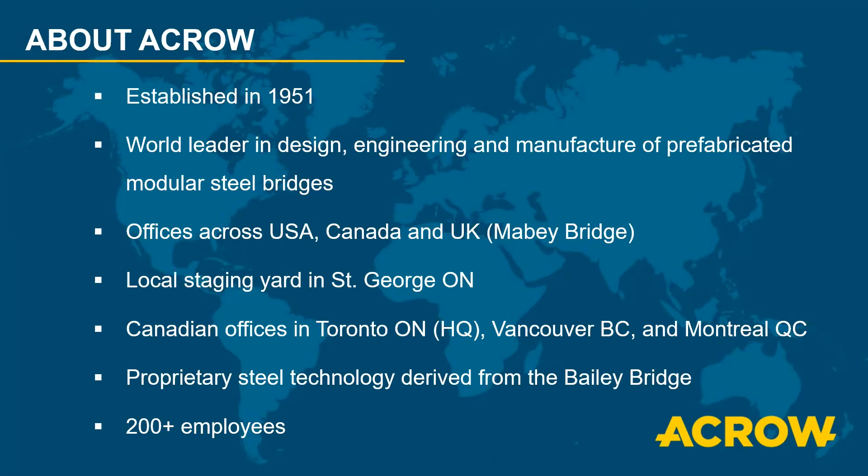It's a proprietary steel technology derived essentially from the Bailey Bridge system. The Bailey Bridge system was developed by Sir Donald Bailey back in the time of World War II, and the Army used this to help fight the war, quickly assembling these bridges to go across. Our system is derived from it, but it is not to be compared with the Bailey system. It is called the Acrow system. It's a panel bridge system, and it has advanced over the years, which I will discuss a little bit later. Our company has over 200 employees worldwide.

So what we do is permanent bridges. Often, when you hear the term panel bridges, we're known for temporary or emergency bridges, international emergency bridges. But we have our fair share of permanent bridges, especially here in Ontario and in Canada. So we do permanent bridges, temporary bridges, as well as military, emergency, and development programs.

Our fabrication and manufacturing facility, Milton Steel Company, in Milton, Pennsylvania, spans 21 acres. It has a capacity for 25,000 tons of bridging per year. We have 95 team members operating over 3 shifts, and we have all sorts of high-tech equipment: 8 robot cells, 26 robots, CNC plasma cutting machines and drills.

You might be thinking to yourself, I signed up to hear about accelerated bridge construction, not to hear all about Acrow. But I tell you who we are and our capabilities really to convey to you that we are an established and sophisticated world-class organization. We have 70 years of experience under our belts, and we know the challenges that bridge engineers like yourselves face.

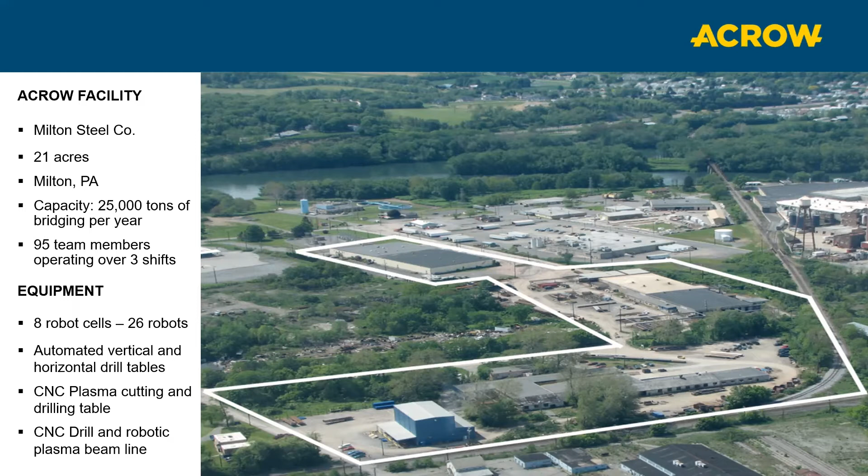So some of these challenges, and I'm sure there are more, but I've listed some of the key challenges, namely failing or inadequate structures. Structures designed before the 1980s generally have a design life of 40 to 50 years. So here we are in 2020, many bridges are now nearing the end of life.

Also, another challenge is limited budgets. That's always a challenge. Municipal tax revenues alone are not often sufficient to build and maintain rural municipal infrastructure. Federal and provincial funding and assistance programs are often not sufficient and typically are too inflexible. So that's definitely a challenge, and it's always a consideration when deciding what type of bridge system to use to make sure that it fits within budgets.

In terms of taxpayer demands and pressures, nobody likes gridlocks. Taxpayers don't want lengthy and inconvenient detours. Also, detours that divert local traffic to another bridge or have them traveling through town can not only have a negative effect on local residents, but can result in expedited deterioration of those detour roads and alternate bridges as well. That volume of traffic still needs to go somewhere. And taxpayers do have some say, some pull, in varying degrees with different cities, municipalities, counties, and townships.

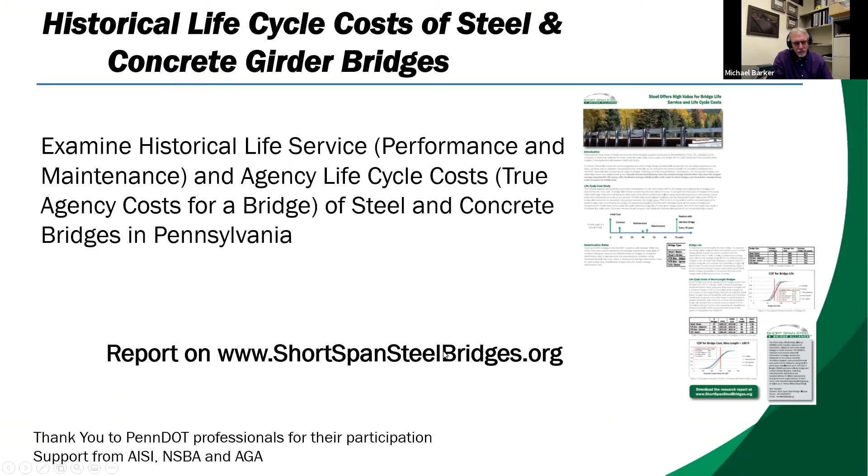Now, since I only have 15 minutes here, I have to make this real quick. So this is really a teaser for you. And if you're interested in this, you go to the shortspansteelbridges.org website and you can see the full report. So we're just going to play a little bit with it. Life cycle cost data - what we need is the whole life history of a bunch of bridges.

We need a comprehensive inventory of bridges if we're going to do some comparisons, which means we need initial costs and the date built, all the maintenance costs and the date performed on that bridge. And then we need to know how long that bridge lasts, or the end of service date.

Well, the bridges in the Pennsylvania inventory are still in service, so I had to come up with an end of life model, which we'll discuss very briefly.

But the second part of this was I really wanted to look at typical bridge structures and modern typical bridge structures. So we're talking about precast I-beams, boxes where the boxes are adjacent to each other, boxes where the boxes are spread with a deck between them, steel rolled shape, and welded plate girder bridges.

And since I'm looking at modern typical bridges, pre-stressing, precasting, all that kind of stuff came on the market in about 1960. And that was also the time that steel bridges really became better at detailing, fabrication, and erection and those type of things.

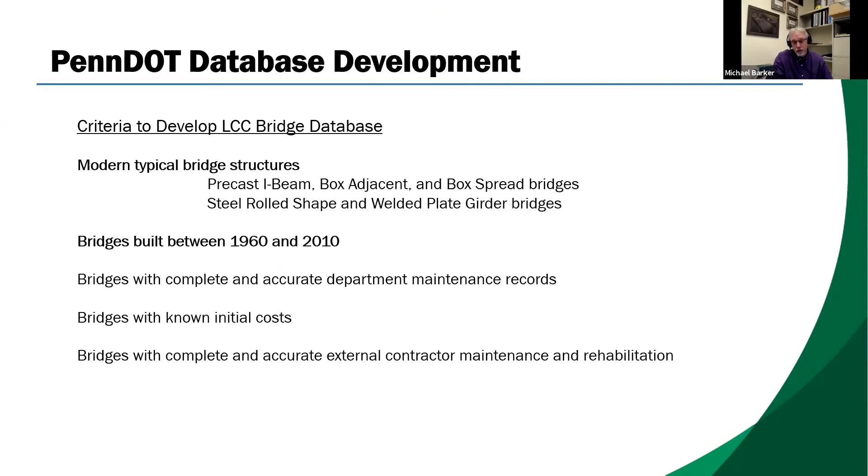So I looked at bridges built between 1960, and then I cut it off at 2010. Then, of course, I needed to know everything that happened to every one of those bridges for it to be in the database. So PennDOT has over 25,000 bridges in their database.

Of those, over 6,500 are of those 5 types of bridges. And when I studied those over 6,500, I came up with a list of steel rolled beam, steel plate girder, box adjacent, box spread, and pre-stressed I-beam bridges.

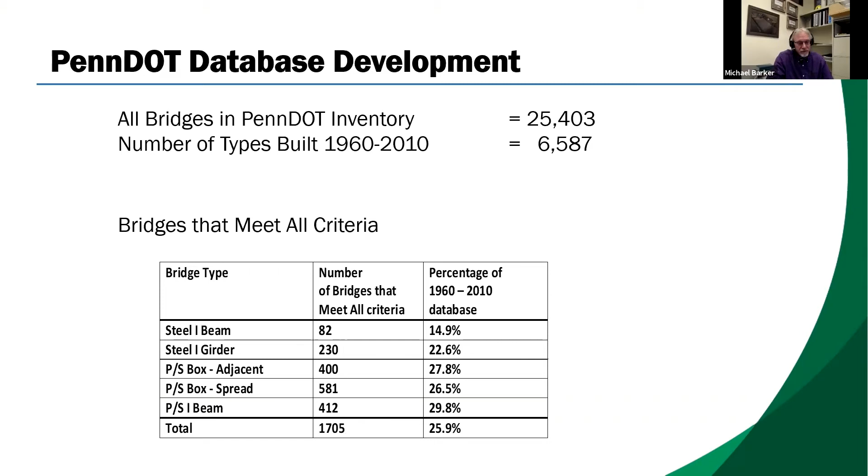And here we had a little over 1,700 bridges that met all the criteria, which means I had the information on everything that's happened to those bridges, which represents a little over a quarter of the potential 6,500 bridges, which is a pretty good representation.

So now that bridge life model, again, remember I'm going through this fast because I only have 15 minutes, but all this is really well explained in the report. And there are hour-long videos on that website where if you are interested, you can go and watch those. So I had to come up with a bridge life model.

When was that bridge going to be replaced? I based it on deterioration rates, historical deterioration rates for all 6,500 potential bridges, where if I assume the bridge was a superstructure condition rating in the US, that's what we use, of a 9 when it was first built, which means it was a perfect bridge, then given that I looked at these bridges in 2014, I can calculate a deterioration rate.

Then, if I assume that bridge is going to be replaced when it reaches a 3, then I can calculate the remaining life. And then the bridge life is just how old is it now plus the remaining life.

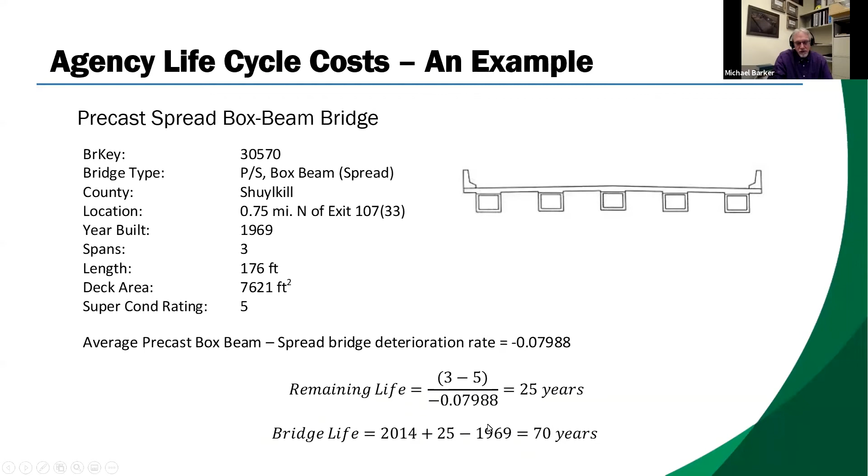But the important part is in 2014, it had a superstructure condition rating of 5. And these type of bridges had an 8% deterioration rate per year. So I can predict the remaining life is 25 years. From 1969 to 2014, that gives me another 45 years. So I am predicting that this bridge lasts 70 years.

Now we deal with the costs. Of course, the costs are based on US dollars, again, making fun of the difference between the US and Canada. But anyways, it was built in 1969 for $141,000. Now I divide it by the deck area so I can compare bridges to bridges, but that's in 1969 dollars. And then in '88 there was some maintenance, and in '09 and '13.

I took every bridge in the database and pretended they were all going to be built in 2014, using construction cost indices to account for inflation. So here are the costs in constant 2014 dollars.

Now I lay out that timeline. Here is one life cycle for that bridge. It's built in year 0. In years 19, 40, and 44 there are maintenance events, and then it lasts 70 years.

Now we find a present value cost for this using a discount rate of 2.3%. We get a present value cost, which is what we do in life cycle costing, of $154.50 per square foot. That means if we had that money in the bank when we wanted to build the bridge, it would sit there and we could pay for those 3 maintenance events, and when we're done, the money is gone.

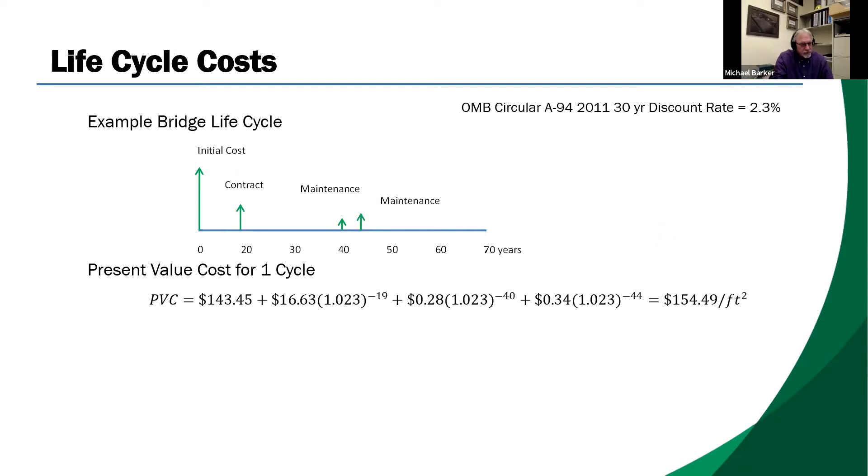But this causes a problem, because this bridge lasts 70 years, and I can't compare that to a bridge that only lasts 40 years since the outcomes aren't the same. So instead we use perpetual present value cost, or what's more commonly known as capitalized cost, which assumes we replace the bridge with an equivalent bridge forever.

When we determine the capitalized cost, it comes out to about $194 per square foot, which means if we had that today, we could build the bridge now, pay for one cycle, and at the end of that cycle we'd have the money there again to do that forever. With capitalized costs, we can compare bridges directly.

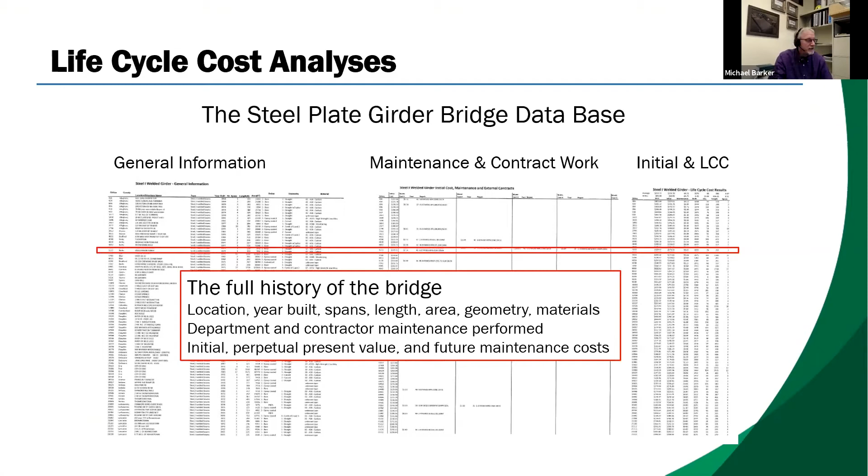So all 1,700 bridges I put into Excel sheets, 3 for each type of bridge. One file had general information: location, year built, spans, length, area, geometry, materials, and that kind of thing. The second file was department and external contractor maintenance performed, with costs and dates. The third is the results, where we look at initial costs, life cycle costs, capitalized costs, and even present value of future maintenance costs.

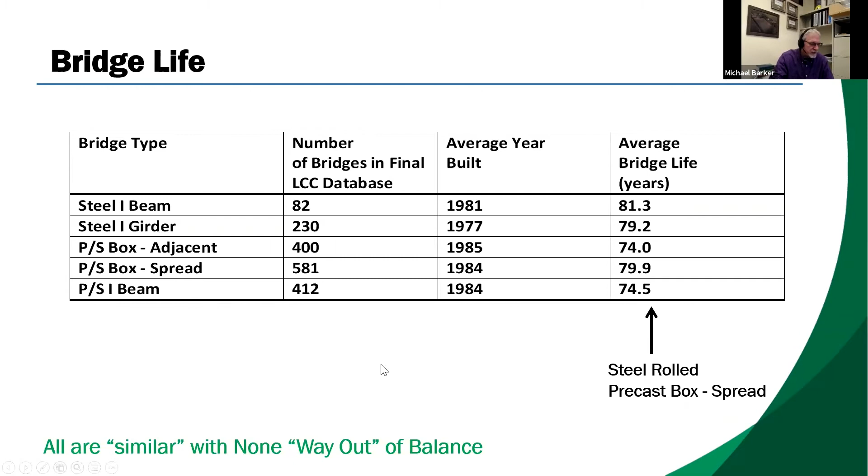Now we come to the money part. This table shows the results for the whole database, all of the bridges. You see the number of bridges in the database and the perpetual present value costs, or capitalized costs.

For all of the bridges in the database, precast I-beam has the lowest perpetual cost, with steel rolled beam second. But again, none of them are way out of balance, so there's that statement on the bottom left: all are similar with none way out of balance.

This table also shows the initial costs and the present value of future costs, the average length, average number of spans, average year built - those are pretty consistent - and the average life again. This is one of the problems: it's hard to directly compare precast I-beam bridges or adjacent box bridges, which are usually simple span bridges, to plate girder bridges, which have an average number of spans over 4. The average length of a plate girder bridge is 406 feet, and even for the rolled beams, it's 166.

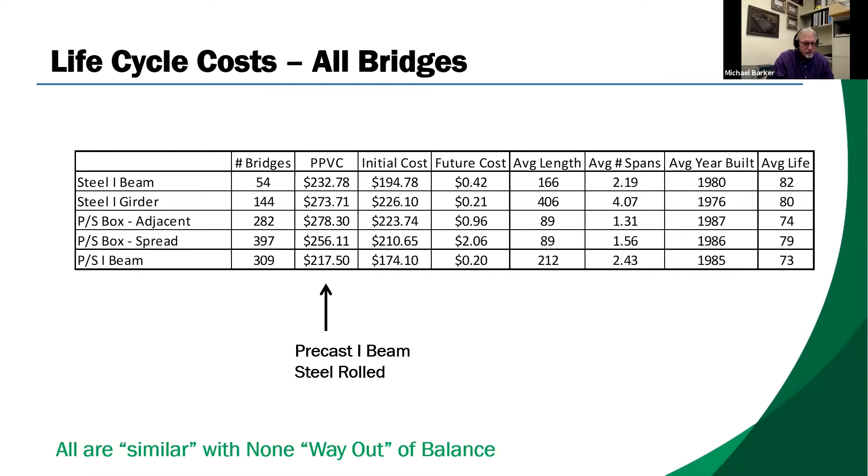This is good to look at, but we need to narrow that down a little bit. Since I'm part of the Short Span Steel Bridge Alliance, we're going to look at short length bridges. The Alliance deals with simple span bridges, but I'm not going to limit it to simple span. I'm just going to say bridges that are less than or equal to 140 feet in length.

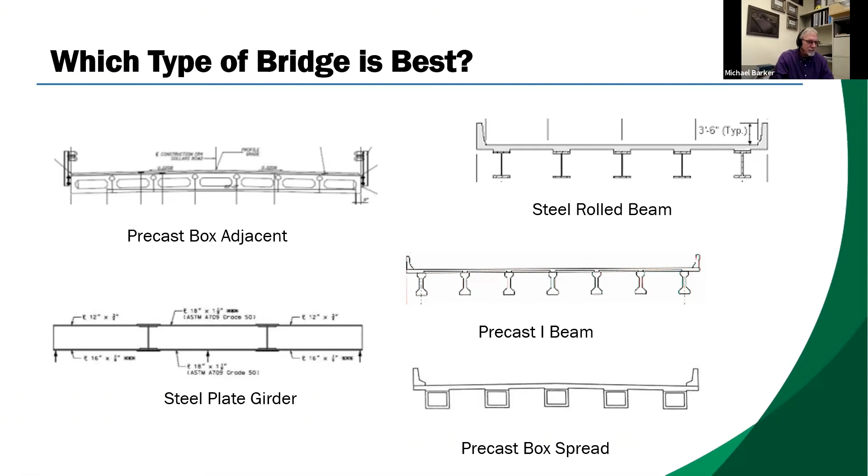And the question is, which type of bridge is best? Is it the precast? Is it the rolled beam? Is it the precast I-beam, box adjacent, whatever. And here's where I come back and say that all are similar with none way out of balance.

If I take the overall weighted average capitalized cost, it comes out to be a little over $252 per square foot. All of the bridge types, the 5 different bridge types, all of their averages are within 14% of that.

I didn't show it here, but I do in a longer version of my talk. If I look at the standard deviation range within each type, or coefficient of variation of 20 to 25%, and if we're within 14% of the weighted average, what that means statistically is that any one type of bridge may be most economical for a given bridge project. There is no one type of bridge that clearly beats the others.

And that brings me to my conclusions. One reason I do this and look at initial costs is because there's a preconception out there that concrete is less expensive than steel. And you thought I was going to come in here and say, hey, steel beats concrete hands down, you should build everything out of steel. No, that's not what I'm saying.

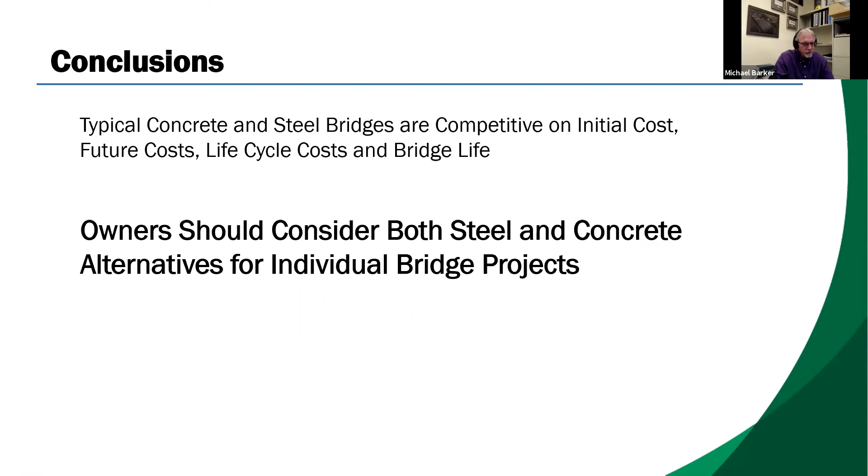The results of this, and what we've known for a long time, is that typical concrete and steel bridges are competitive on initial costs, future costs, life cycle costs, and bridge life, and that owners should consider both steel and concrete alternatives for individual bridge projects. And so that finishes me up.

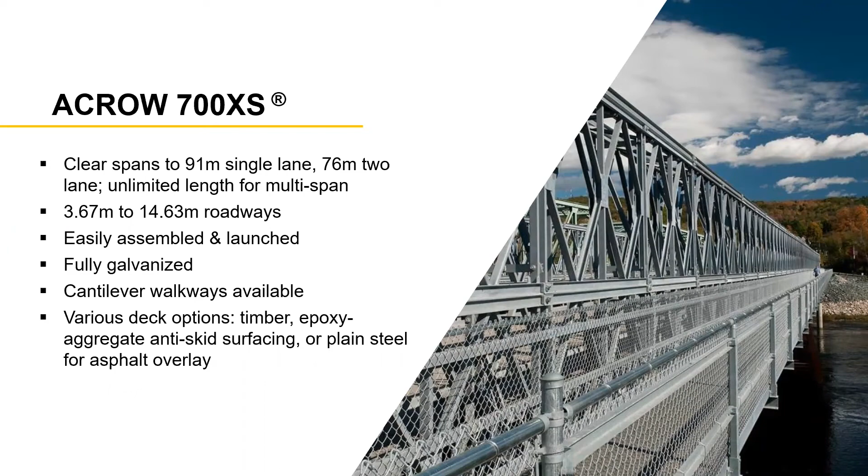Here's the system. As I mentioned, it's a modular sort of thing. Panels are assembled, and the configuration of this bridge can be different depending on the criteria that we design for. So whether you have one line of trusses, or two or three lines of trusses per side, like this one here, we will determine based on the loading criteria what configuration needs to be designed for the bridge.

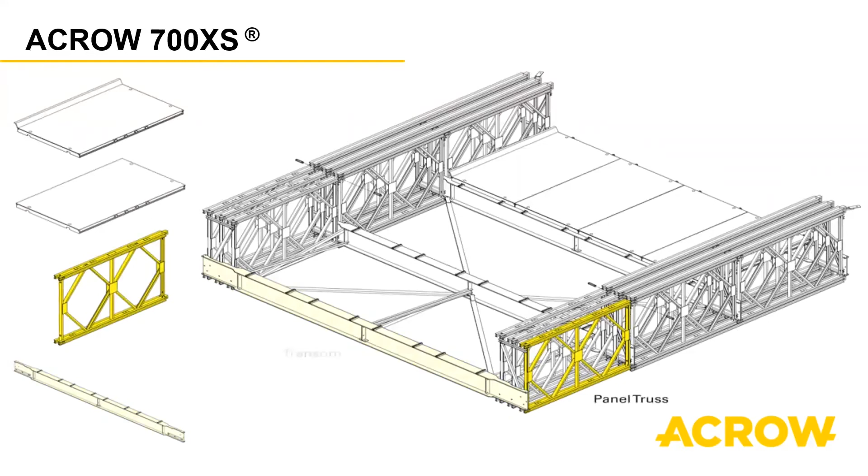The floor beam, or the transom as we call it, also varies depending on the design criteria. We have various different widths, and various different strengths of transom.

And then we have the decks. These are the steel decks, orthotropic steel decks. This is a curbed deck that basically has a curb on either end or either side of the bridge. And then we have just the standard decks. Essentially the width of our bridge is determined by the width of this deck, so you can do it in increments of the width of this deck.

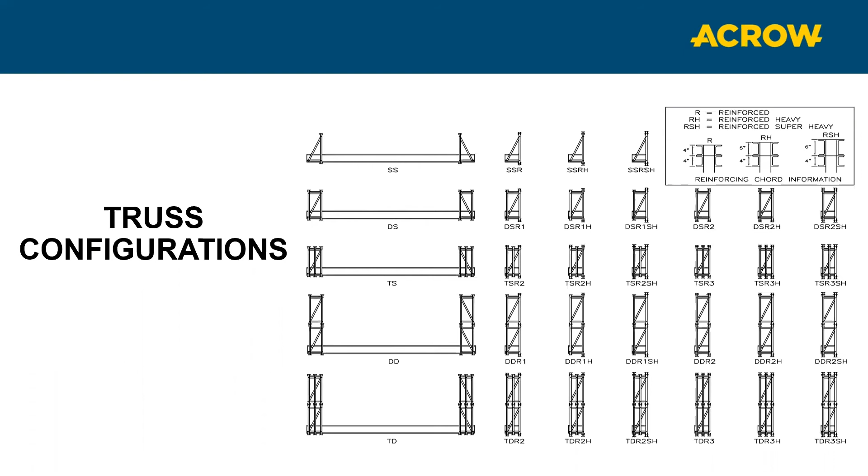In terms of guardrails, we do offer an integrated post and box beam guardrail steel that essentially takes away the worry of damaging the truss panels if there is an incident or impact. The guardrail is connected to the transom or floor beam, therefore the impact is absorbed by the transom as opposed to the truss, minimizing damage to the truss itself.

We also, oftentimes, thrie-beam guardrails can be used. These are standard, not supplied by us. They do not meet the crash tested criteria like the previous one does. With the two tubes, the two box beams, this is crash test level compliant, up to AASHTO test level 4. Canada does follow the AASHTO code as it relates to guardrails, so it complies.

Thrie-beam, as I mentioned, does not meet the crash tested criteria under AASHTO, but often they don't need to when used on rural roads and bridges. The thrie-beams can be applied directly to the truss beams, and this is often the case for rural municipalities. We see municipalities and the MTO specifying a thrie-beam or flex beam right on the panel trusses themselves, and this is an option. However, we highly recommend if you go this route to ensure there is a double truss line bridge line, so there is a level of redundancy, because the impact is absorbed by the truss and not by the transom in this case when using a thrie-beam.

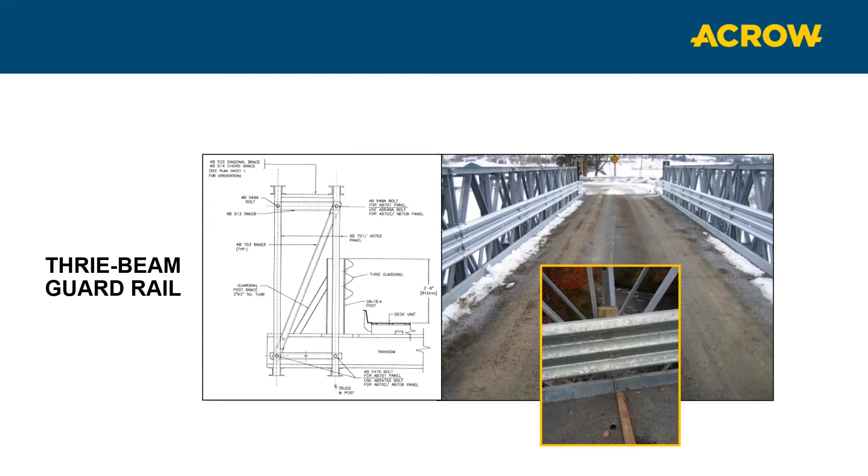At Acrow, we determine the truss configurations based on the design criteria we're given, be it the span, roadway width, design loading, design life, the code being used, etc. We only design the bridge superstructure, not the foundations. We give the reactions at our bearings to the people designing the foundation so they can use this information, and we also supply a bearing layout to assist with the abutment designs in terms of geometry.

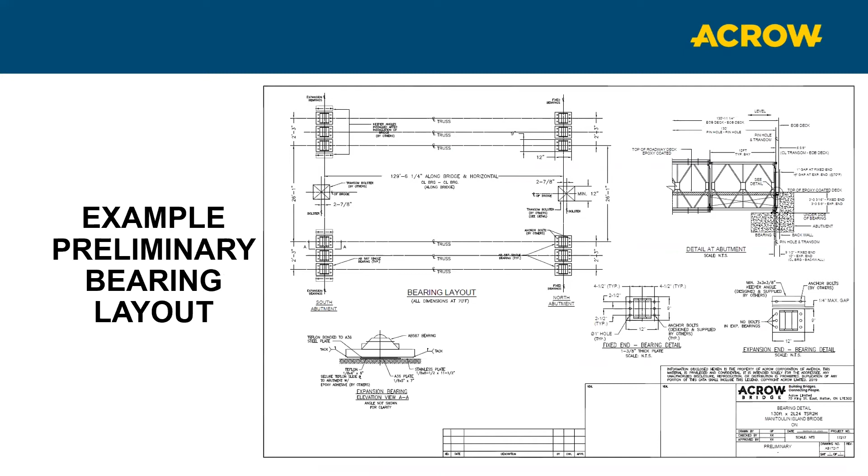Now, in terms of installation, these systems are fairly simple to install. There are three typical methods used: cantilevered, crane-assisted, and crane lift-in. I'm going to briefly go over all of these.

The cantilever launch method allows an Acrow bridge to be rolled into place without the use of a crane. There's a launching nose that we design, utilized when you don't have access to the opposite abutment to use a crane to pull it. So you can only work from one side, and this launching nose lets you push it across to the other side, then remove it once it's there and you've jacked it down onto the abutment.

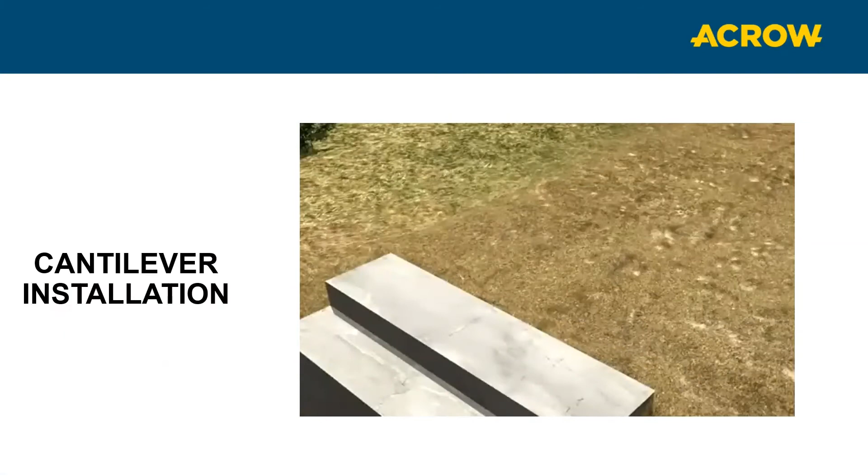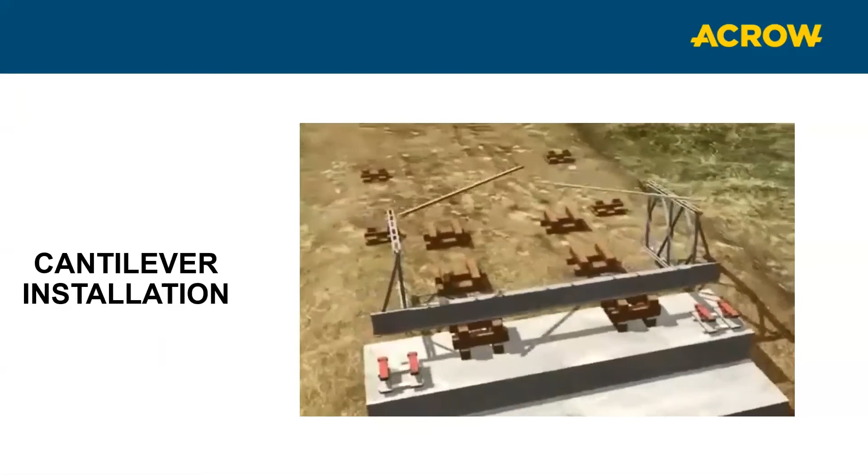There's a short video here showing the cantilever installation method. This shows how these parts assemble—it's an incremental assemble-and-push technique when doing a cantilever launch.

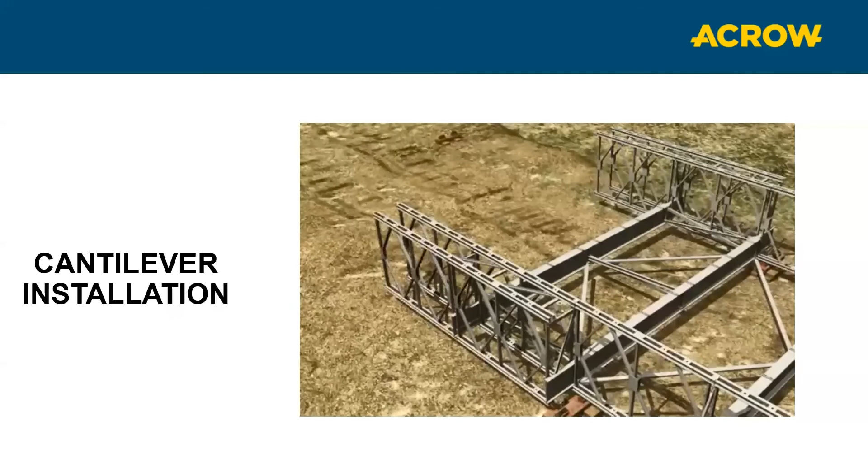Here, they've assembled the launching nose, transoms, and beams. This one is a double-single, so you have the double truss line and a single story. As they assemble, they have the chords and the reinforcing chords that they're putting at the top and bottom, and then they begin the push.

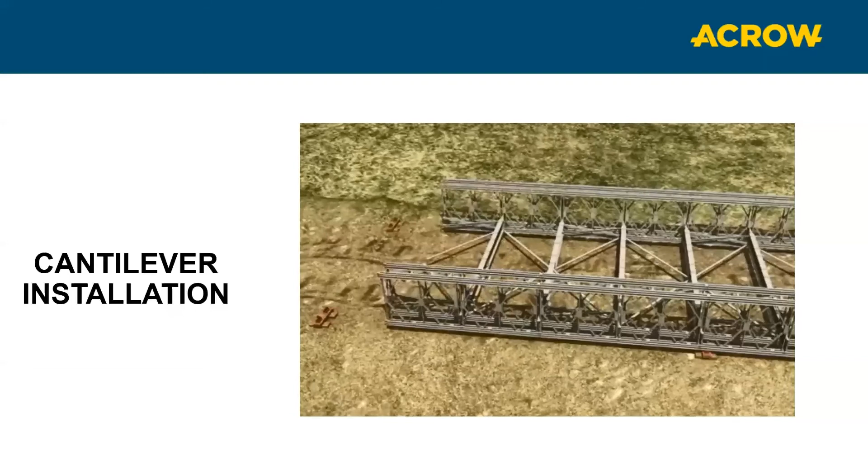You don't necessarily need heavy duty equipment for this—you can use a dozer, an excavator, anything. We provide rollers, as you can see on the ground there, that you would push. So they're incrementally assembling and pushing.

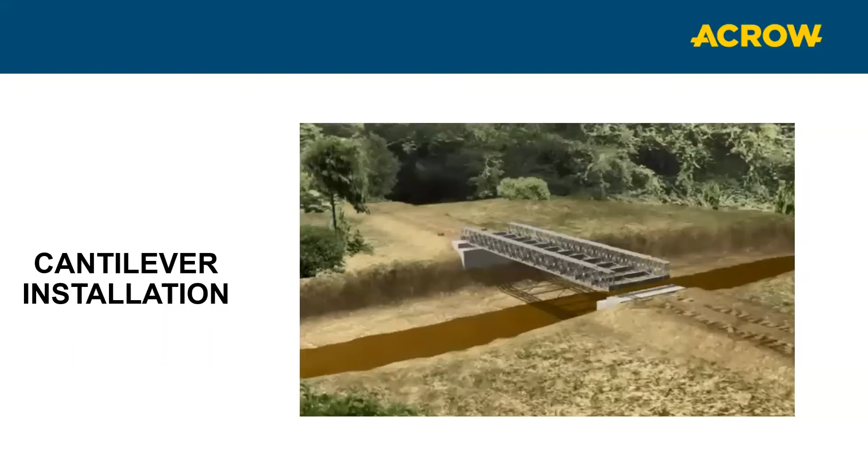What you saw at the back is the decks, the steel decks, being used as counterweight, which is typically the case. And there you go—they've jacked it down and are putting those steel decks into place afterward. At this point, you can install guardrails and such as well. So that was the cantilevered launch method.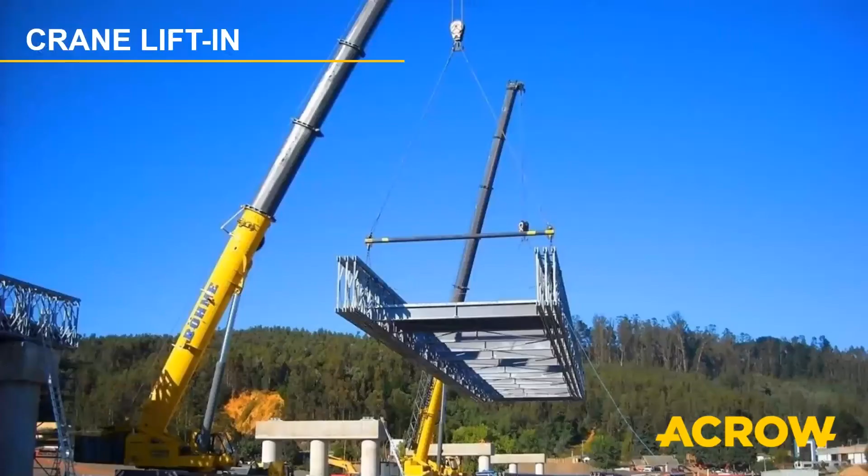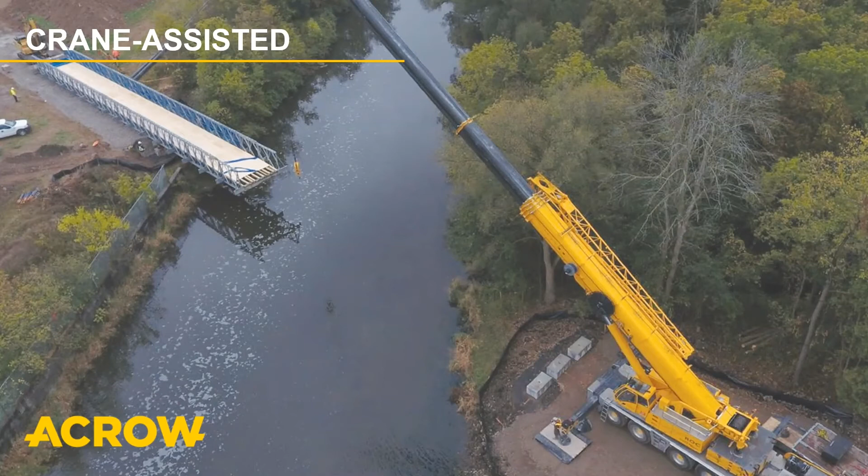Typically, what most people use is the crane-assisted launch method. An Acrow bridge can be launched using a crane if the required equipment is available and you have access to the opposite abutment. This is similar to the cantilever launch in that there are rollers and you push it, however there's no launching nose. You push it up to a certain point, keeping the center of gravity on the home abutment so it doesn't tip over. At a certain point, close to the middle, the crane takes over and lifts the bridge, and you can push and pull with the crane.

Finally, with the right size crane, an Acrow bridge can be lifted into place. This is the fastest method, suited for exceptionally demanding situations where timing and speed are critical, assuming the span isn't enormous. This is a very efficient method of installation—you just rig it up onto your crane and place it on your abutments.

Now this here is an approximate Acrow speed of construction. These panel bridges go up very, very quickly. This is by no means an exact time estimate, but given our experience, a span of 10 meters can be assembled in a single day, which is significantly faster than concrete type bridges.

Next, I want to present some bridge application examples and demonstrate how accelerated bridge construction through the use of steel panel bridges can address the need for speed, durability, versatility, and cost effectiveness in project delivery. I'm going to go over these fairly quickly—we have a lot of slides and not a lot of time, so hopefully you'll capture the gist of these examples. So, vehicular bridges done with the system—these are pre-engineered.

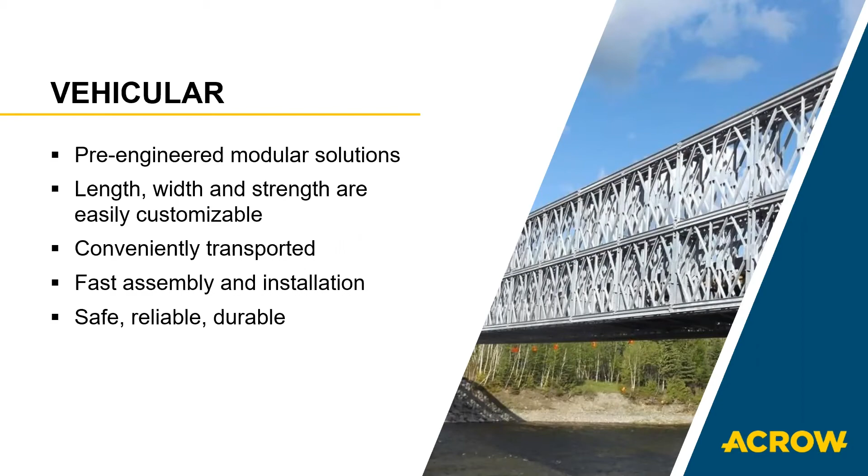Here's an example in the Yukon. This is one of the first permanent bridges we did. It has a sidewalk, or footwalk, on one side with a custom railing system, in extreme cold. Acrow doesn't use notch tough steel, but this bridge has held up very well with no cold, brittle fracture.

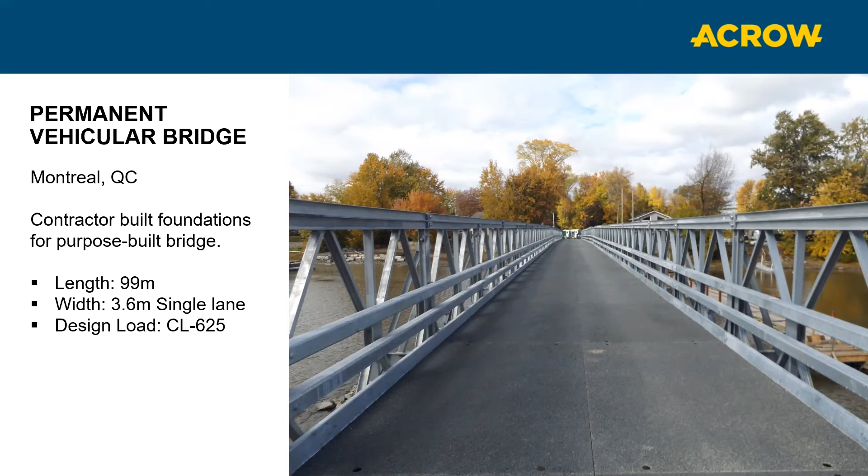Another permanent bridge example, same as the previous one. You can see the bridge has a slight camber. It's a 99 meter span bridge, single lane, 4-span, 99 meters total length, designed for CL-625 loading.

This permanent bridge is in the Township of Lanark Highlands in Ontario, showing the asphalted surface and the TL4 guardrail, the integrated post and box beam guardrail. The township put this out to tender and it was over budget. They knew of us because we were doing a project nearby, and considered our panel bridge. Ours was nearly $1 million less than the original consultant-designed bridge, so it was a nice solution for them.

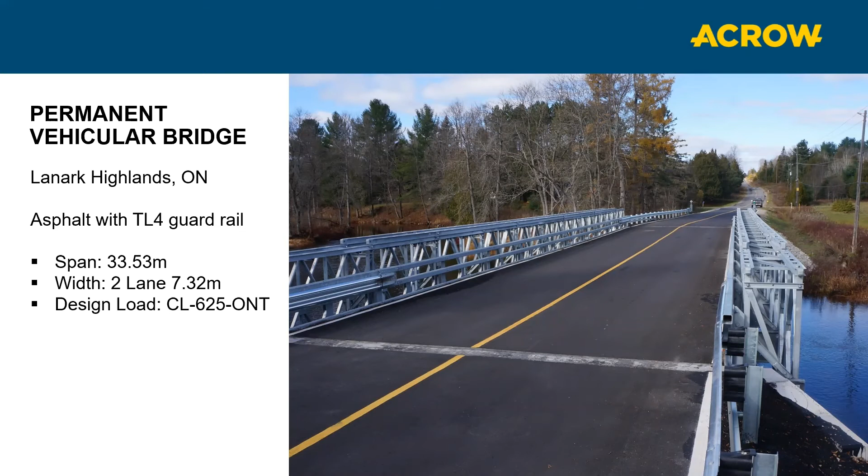Here's another permanent bridge example, City of Port Hope in Ontario. Permanent bridge, asphalted, TL4 guardrails. This is our wider 2-lane bridge, 9.1 meters. It has custom railings at the ends and a nice bike rail as well.

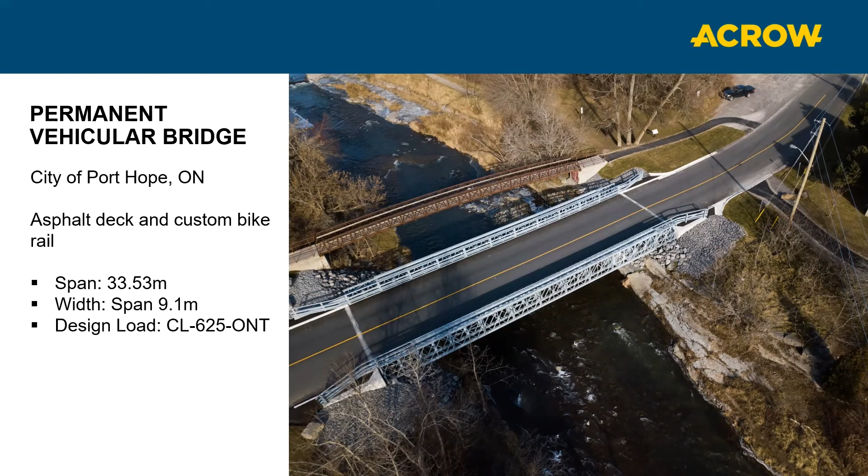This is the Edison Road Bridge in Vienna, Ontario. It was prefabricated with steel stringers and a steel grate decking, or grid deck, which allows mud and snow to fall through.

Here's a project in Toronto, Ontario. I want to show you this because it has a poured in place polymer deck, consisting of a polymer modified cement applied at a thickness of 12 millimeters, which seals the surface from salts, de-icing materials, petroleum, and most chemicals. That's not something we supply, but they were able to do this over top of our plain steel decks.

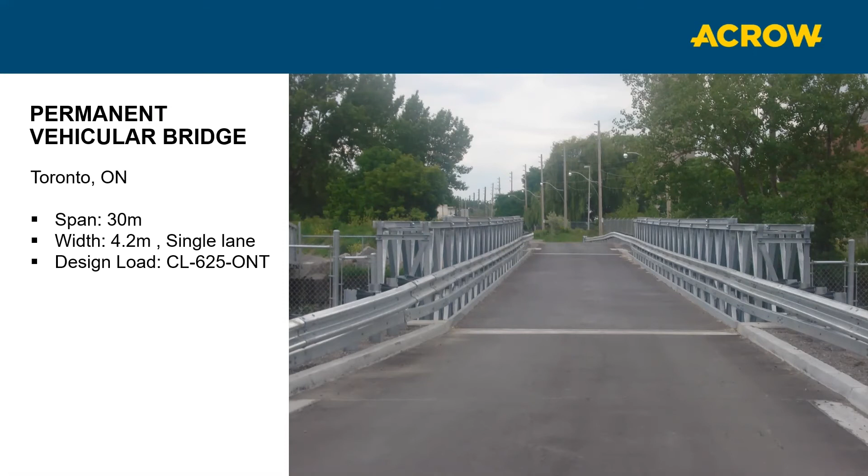Here's a bridge in northern Manitoba showing timber decking. The main span is 76 meters across 3 spans, on a winter road in a very remote area. It has different configurations for the different spans - you can see at the forefront it's a single story, and in the middle it becomes a double story. This was designed for CL-625 loading.

This one is a temporary service road bridge purchased by the city of Regina, then repurposed as a secondary road bridge. I wanted to show this because it's something municipalities can do - they can take ownership of a bridge, purchase these panel bridge systems, and then reuse them as needed on future projects.

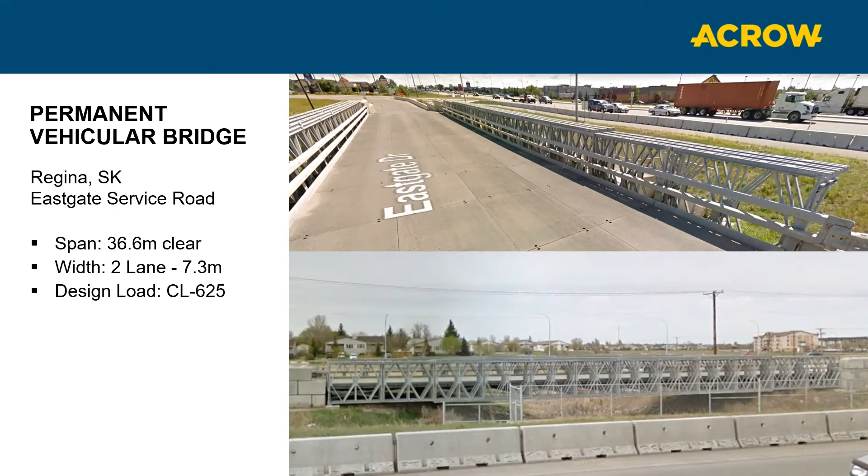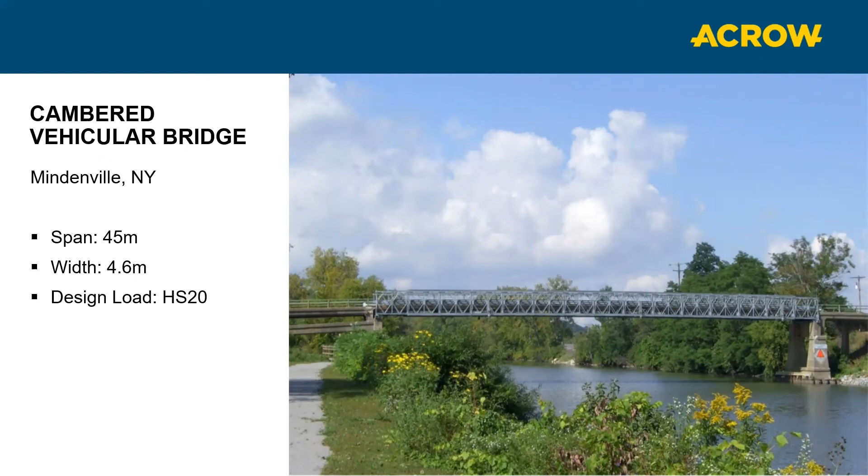This is another cambered vehicle bridge in the USA, crossing the Erie Canal. It was designed to be supported by existing piers, so there was no need to beef up the piers - they used what was there, and our bridge was light enough to go on the existing abutments.

Now, talking about long span bridges, we have systems suited to long clear spans of up to 100 meters. We can do multi-spans with no limit in length, single or multiple lane. These can be rapidly mobilized and installed, and are designed for high fatigue permanent applications.

This system is the Mabey Delta Bridge system. It is similar to the 700XS in that it's steel and modular, but a little different - these are much larger in size. These panels are 4.5 meter modules, but we can do 4.2 meter to 10.5 meter roadways, in increments of 1.05 meters, which is the width of the decks for this system.

These are easily assembled and launched, and you can achieve long clear spans. They're pre-cambered and have preloaded connections, fully galvanized as well, similar to the 700XS. Cantilever walkways are available with this one too, along with anti-skid surfacing on the decks.

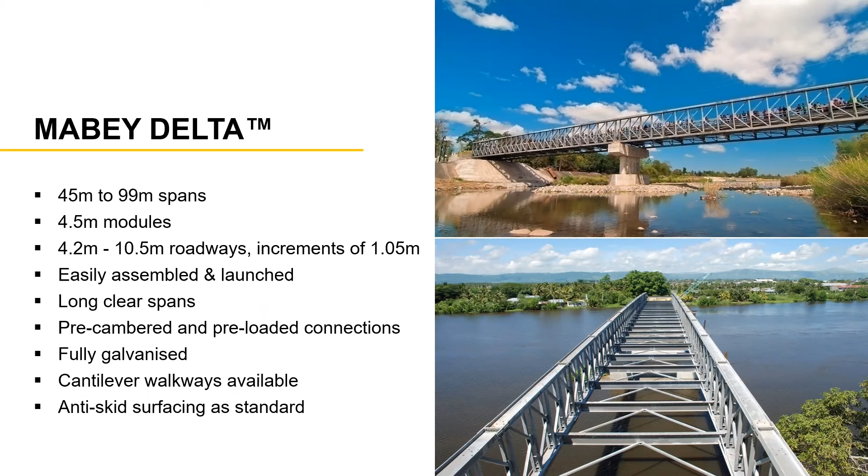One of the features of this system is that you don't need two or three truss lines - a single truss line can accommodate most of the bridge criteria, giving a more open view compared to having multiple truss lines. This schematic shows the various components - you've got transoms, reinforcing chords, panels, and decking modules. This is another example of a modular bridge system.

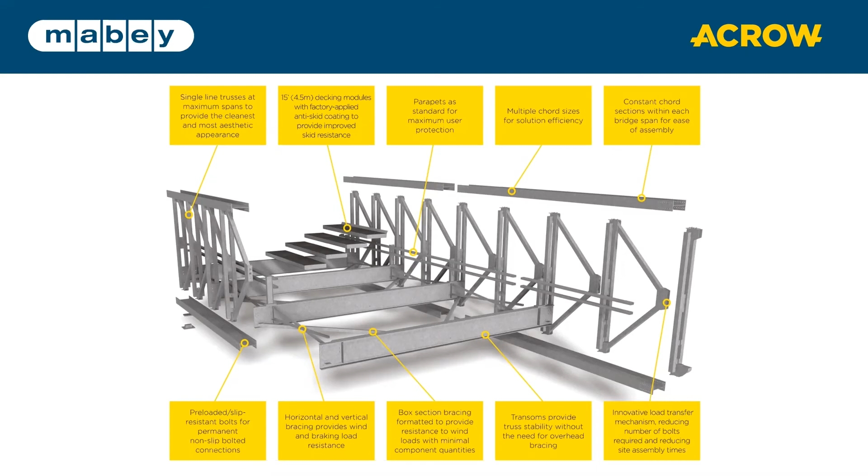Here's an example here, called the Caroni Bridge, linking north and south, in Trinidad and Tobago. It's a nice looking bridge, pretty hefty bridge, with a span of 81 meters, and the installation time for this was 21 days.

Here's another one in Switzerland, replacing an old bridge with a new permanent structure. This is a 90-meter span bridge, and the environment was protected in a single span, so we didn't need to put a pier in between. We discussed previously about environmental regulations - this isn't in Canada, but in Canada there's lots of regulations. So where you can avoid piers, it's definitely a plus to be able to do so with a system like this that can achieve long single spans.

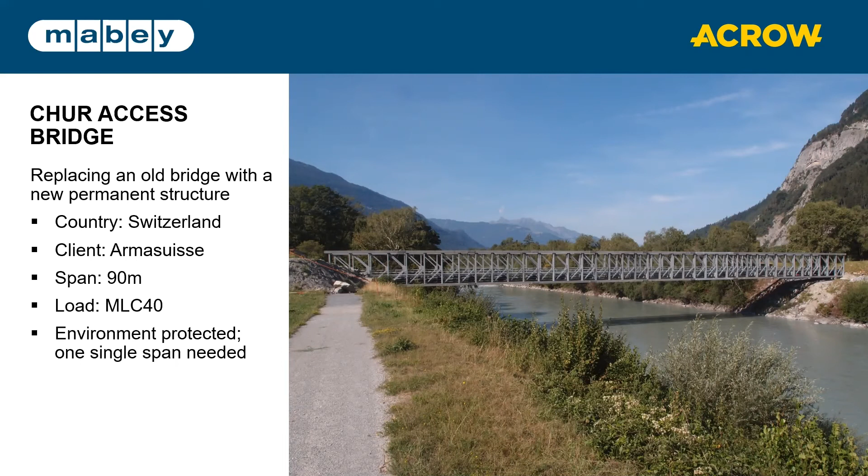This is another long span bridge here, built for 35-ton trucks. It was built in 1983 in northern BC, and it was meant to be a short-term temporary bridge, but it stayed in place until 2017. It was heavily overstressed and was inspected regularly with no signs of damage.

So this one was built on one side and pushed across - nearly 430 meters in 70.1 meter spans.

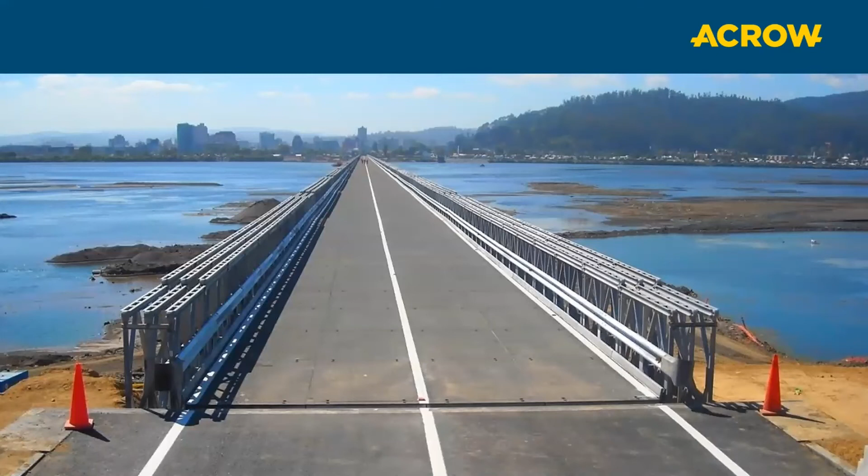This bridge here is in Chile. It's a 1.4 kilometer span, multi-span bridge, 2 lanes. I'll discuss this bridge again a little bit later in the emergency bridge section, but it's a beautiful bridge - it was put up very, very quickly. Here it is in a different view. Just goes to show we certainly can do very long bridges with multi-span.

Then on the opposite side of the spectrum, we also can do very short span bridges. This one here is just a 12-meter bridge, 2-lane bridge designed to CL-625 loading. This is Crosslink's Forest Hill Station in Toronto, and the bridge was used to maintain traffic while construction of the subway was underway.

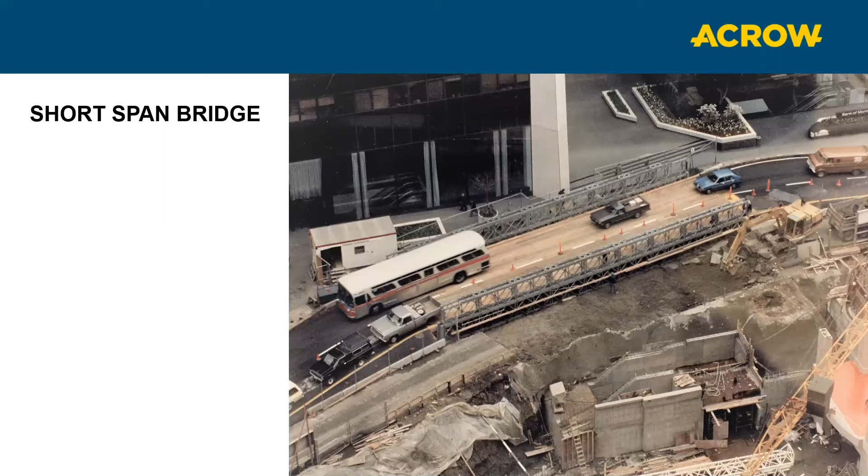Another similar project in Vancouver - you build the bridge, trench it, build the subway, bury it, then remove the bridge. It makes it very simple for use in these applications.

Bridges - I'm not going to get into all of these details, but this is something we also offer for short span applications. It's another system that's conducive to accelerated bridge construction.

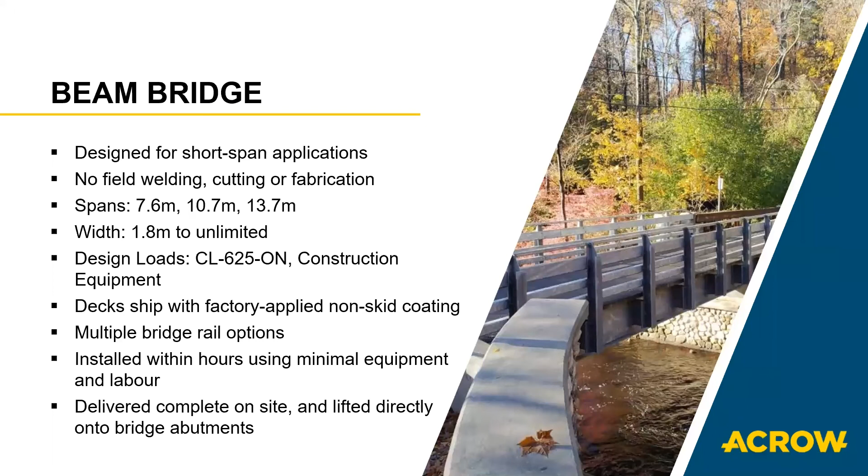Here's a couple of drawings or photos showing examples. This is a 14-meter, 5.5 meter wide beam bridge. It's a low profile, as you can see - 15 inches from underside of bearing to top of deck, and it's very, very quick to install.

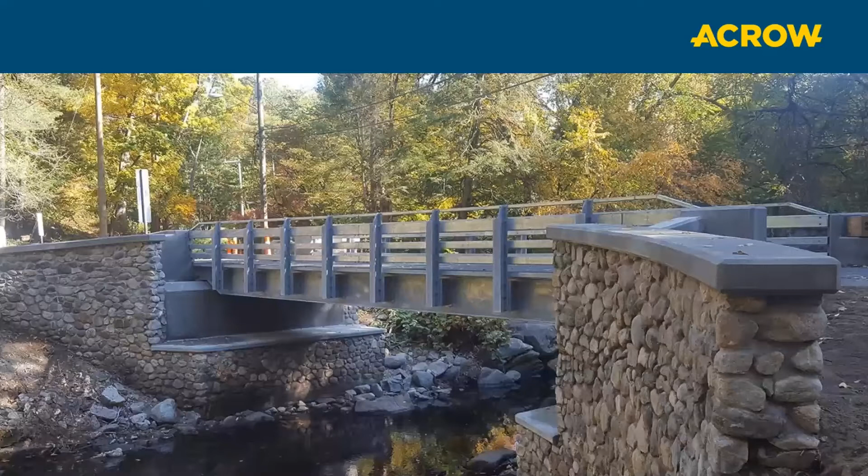Another example here - these come in basically 6-foot wide segments. Very easy to transport, very easy to install.

Now moving along to pedestrian bridges. These panel bridges can be used for pedestrian bridges as well. They're quick and easy to install, supplied with your choice of timber or epoxy aggregate anti-skid deck. They have hot dip galvanized coating as well, with minimal maintenance requirements, and they can be designed with a positive camber for aesthetics.

Here's an example of a pedestrian bridge - the Chedoke pedestrian bridge in Hamilton. This is a 79-meter single-span pedestrian bridge, 2.4 meters wide. It was the only option for this particular project because it's modular, and they would not have otherwise been able to bring steel girders in - they would have had to build a road because the site is a 1 mile walk in. So they were able to do this because of the modular nature of this panel bridge system, the Acrow panel bridge system, and they pushed the bridge essentially with a dozer.

So they wanted this to be a pedestrian bridge, but also to accommodate pickup trucks, so it was designed to accommodate vehicles as well.

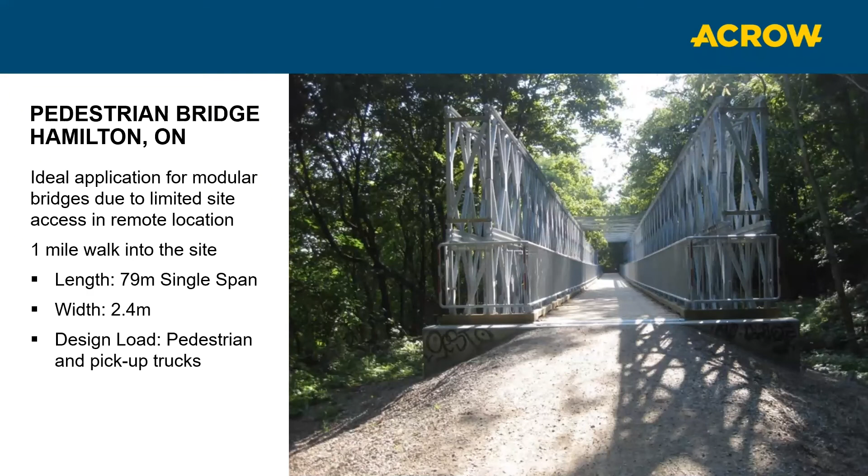Here's an example in Quebec - the span is 36 meters, 3.6 meters wide, with a timber deck and timber rails. Essentially you don't need anything fancy necessarily for pedestrian bridges in this application. And we also do snowmobile or recreation bridges as well, similar to this one.

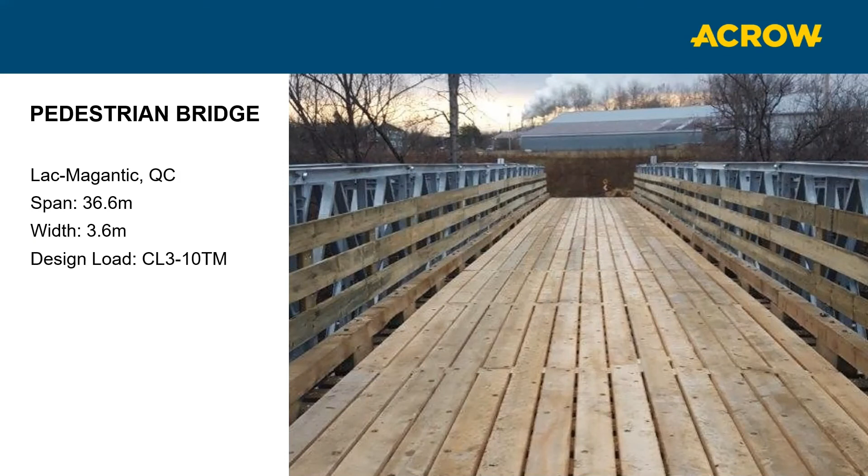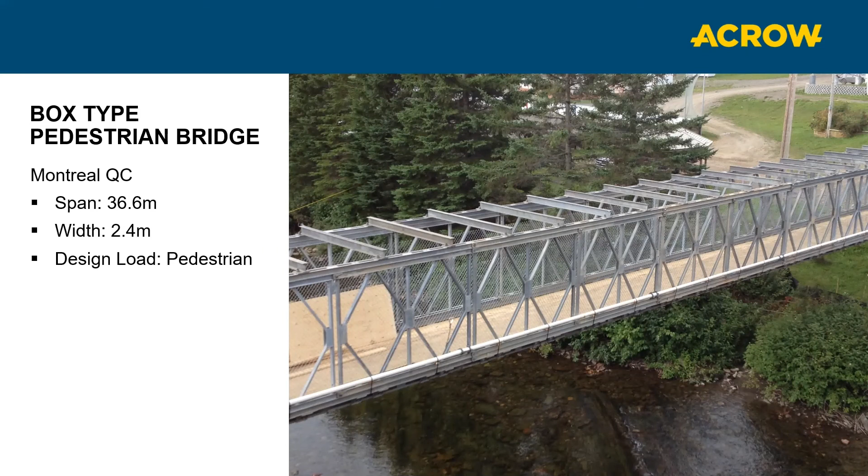We also offer box type pedestrian bridges. Essentially, it's got our Acrow 700XS panels on 3 sides. This is a nice temporary solution during construction as a pedestrian box bridge.

Then we get into the heavier loading. We've done a lot of railroad bridges in the past—ideal for this, engineered to accommodate both freight and passenger trains, designed to support Cooper E80 loadings, and available for rapid deployment, installed in just days. It's suitable for both permanent and temporary railway applications.

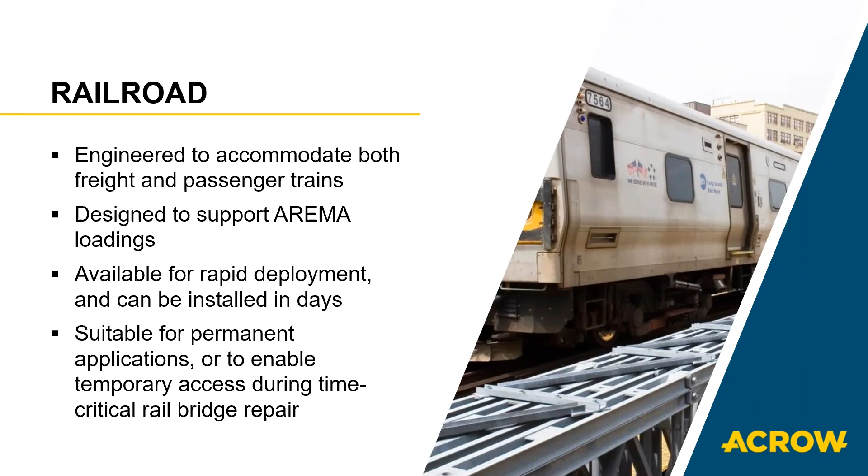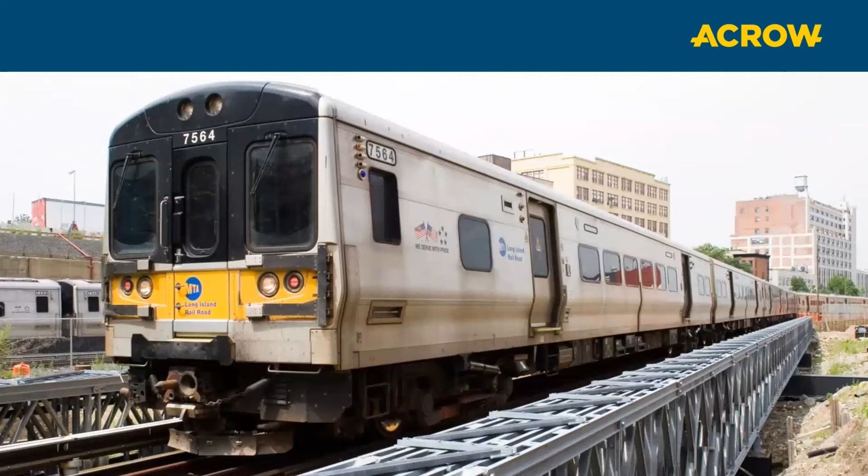This is the same bridge here. Here's another one in Ohio, US. And this one's in Brooklyn, New York.

And then detour rentals. I think a lot of times when one thinks of panel bridges, this is what comes to mind—temporary detour bridges. I've shown you other permanent applications the system could be used for, but these bridges are definitely well suited for temporary and detour bridges. They can achieve accelerated bridge construction, economic rental solutions, and safe detours around construction sites.

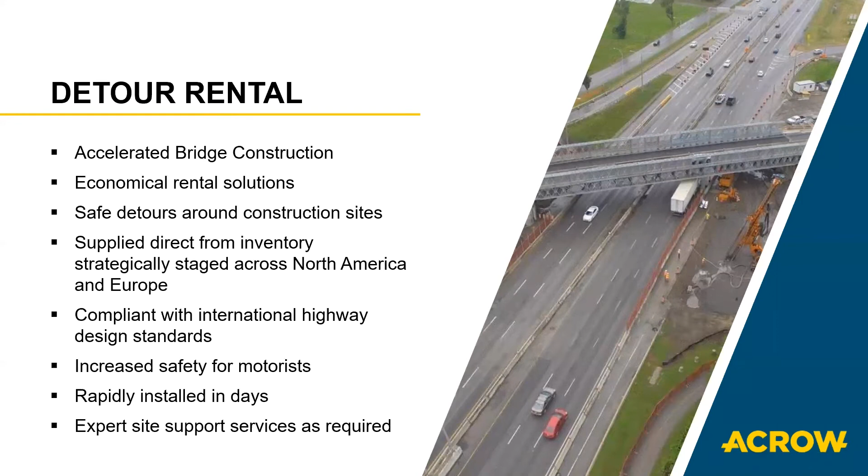Let me show you a bunch of photos here. This one is a project in Quebec, a 3-lane bridge, 60-meter span, 11 meters wide. It's cambered, has an asphalt surface, a full drainage system, and is super elevated. So it's got multiple things going for it. This was a very interesting project.

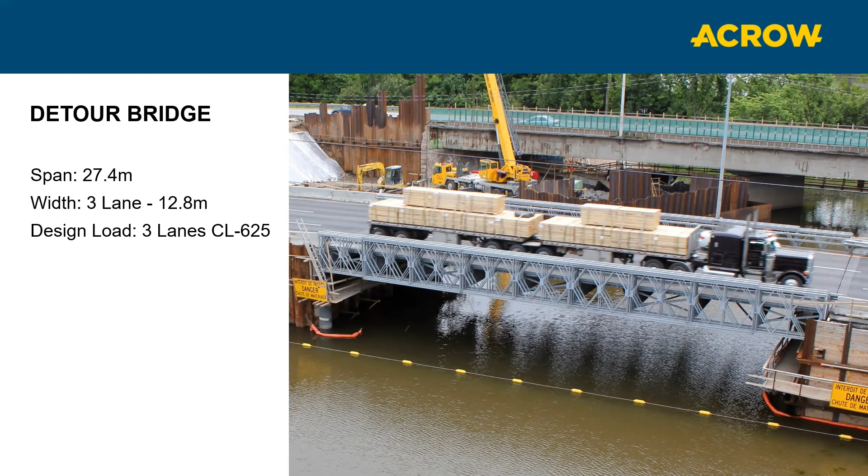Here's another example, 3 lanes wide. This speaks to our capabilities for 3 lanes of fast, furious highway or freeway loading.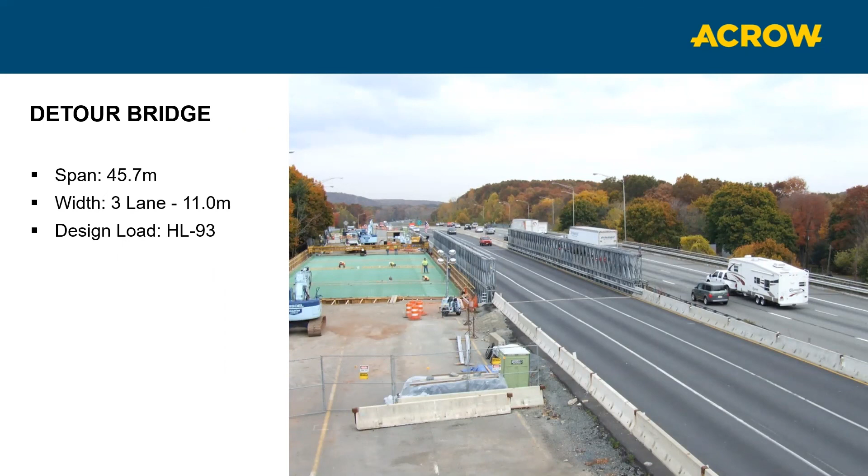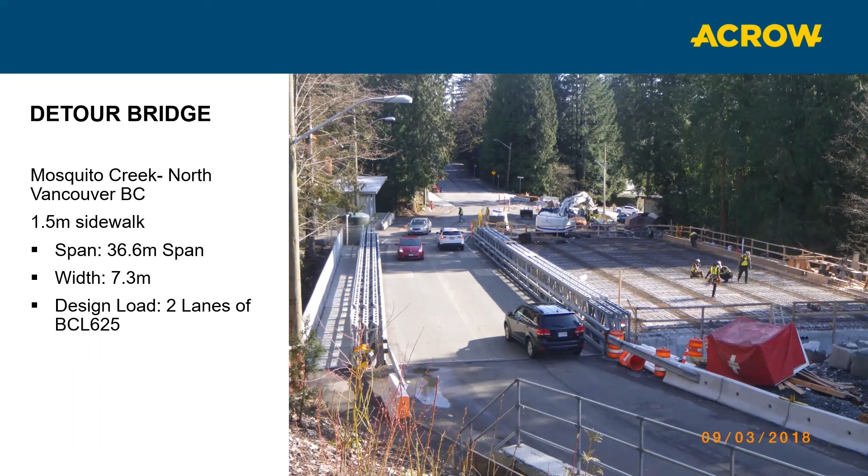This one here in North Vancouver, BC, was a really tight spot for installation. It was launched on rollers onto a temporary pier and pushed out a little further, and the crane received it on the other side.

This is in Quebec, one of 2 detour bridges—a very difficult installation, tight spot. But there's the other one, the second.

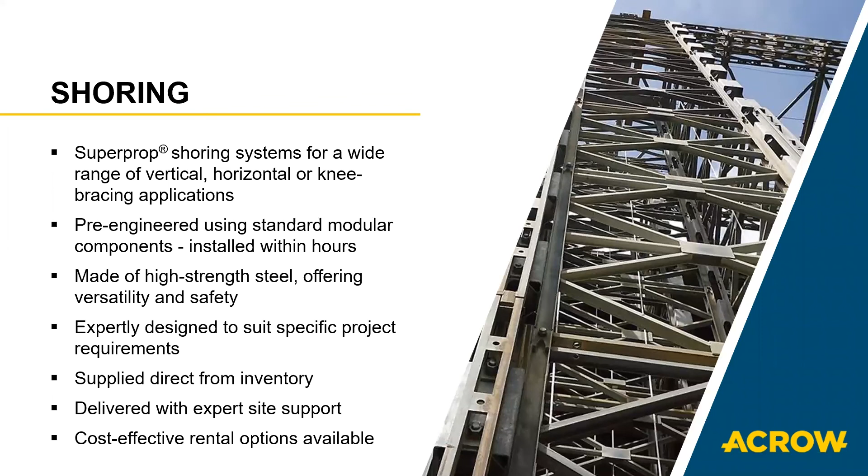Moving on to a different application here: shoring. These are Superprop shoring systems for a wide range of vertical, horizontal, and knee bracing applications. I won't get into this too much in the interest of time, but really this is something we can provide as a support scheme—tower shores assembled essentially using our panels from the bridges as the shoring components.

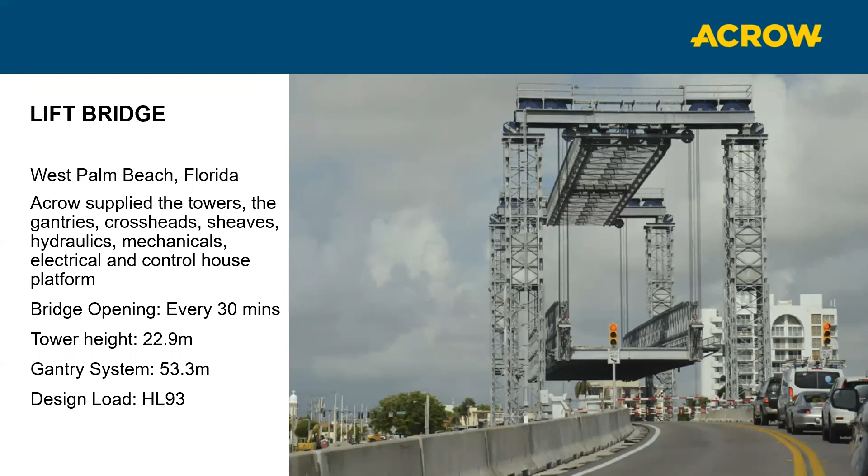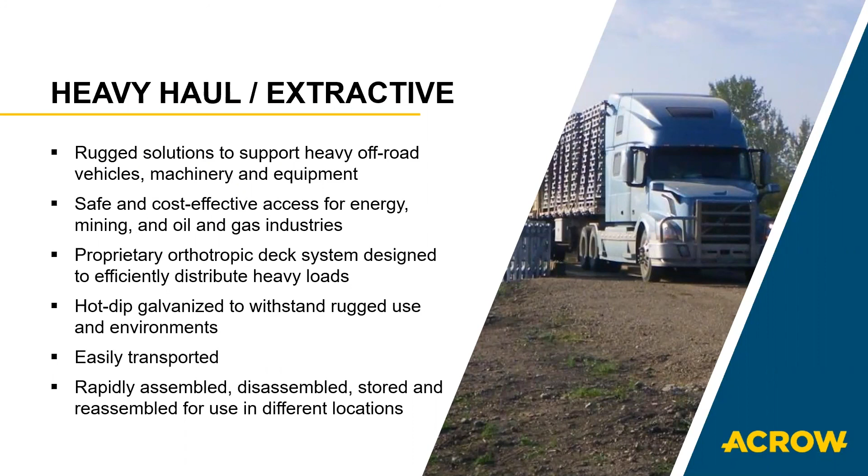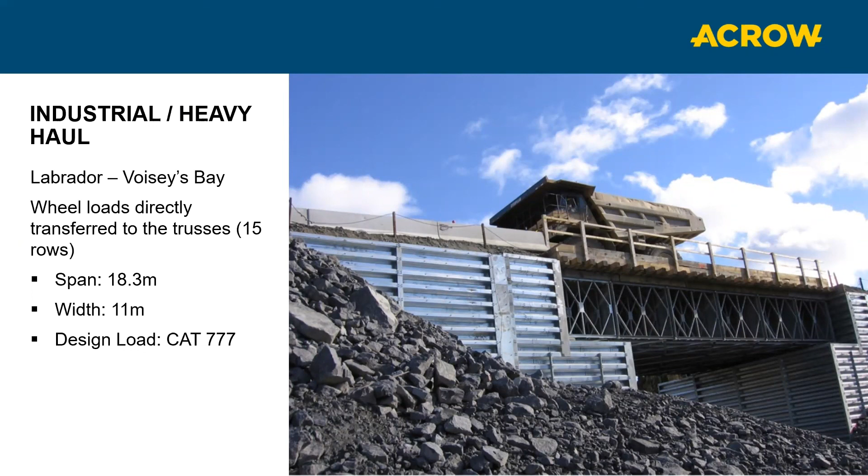In terms of heavy haul, rugged solutions, these definitely support heavy off-road vehicles, machinery, and equipment. Here's an example—an interesting solution with 15 rows of trusses, in Labrador, Voisey's Bay. This was done because the truck had a heavier axle than the capabilities of our standard bridge, so it was an innovative solution to this challenge.

Just again, showing industrial heavy haul examples of heavy haul bridges.

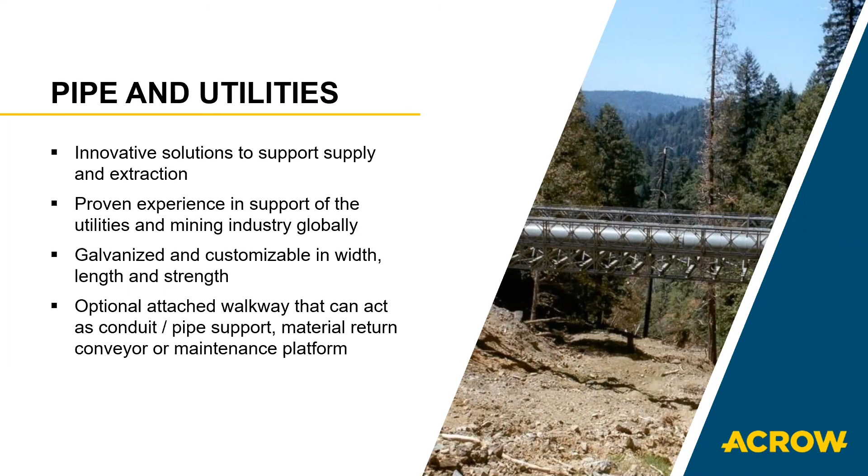In terms of pipe and utilities, there are innovative solutions to support supply and extraction. Here's an example in the city of Cambridge. There's a water treatment plant, and a utility pipe was laid over this.

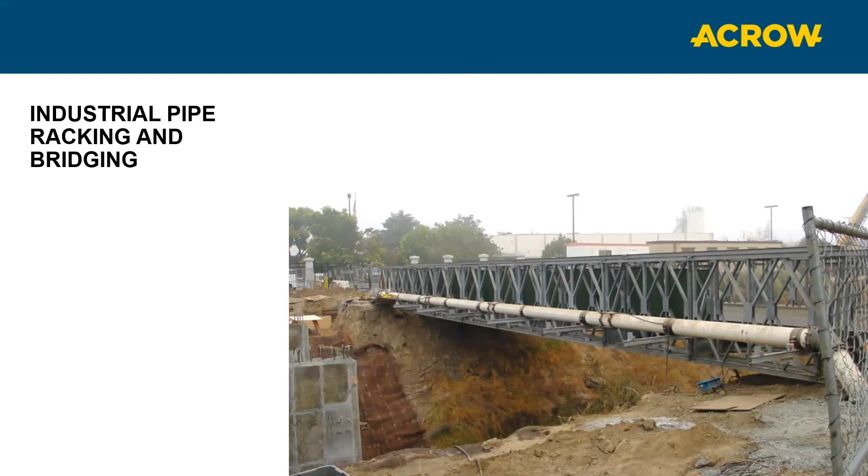Now, in terms of these emergency bridges, I mentioned previously rapid response teams to deliver restored infrastructure. We've done many different emergency bridges, and I'm just going to go over a few of these.

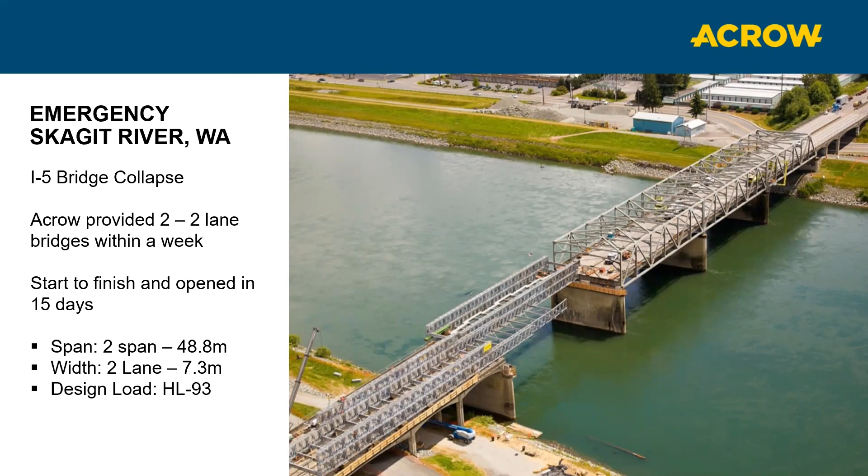This is that bridge I showed you previously under the long span bridges—the emergency bridge in Chile. There was an 8.8 magnitude earthquake, and two cities were cut off because the existing bridge was damaged. This bridge was installed in 88 days: 1.4 kilometers of bridge installed in 88 days.

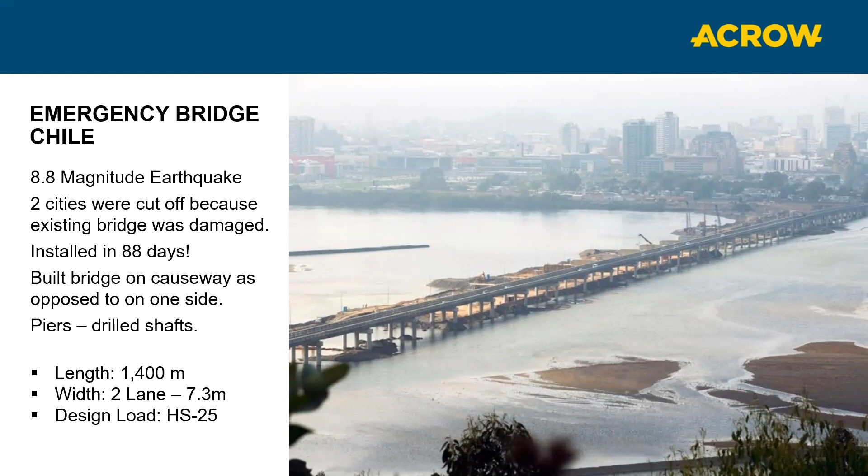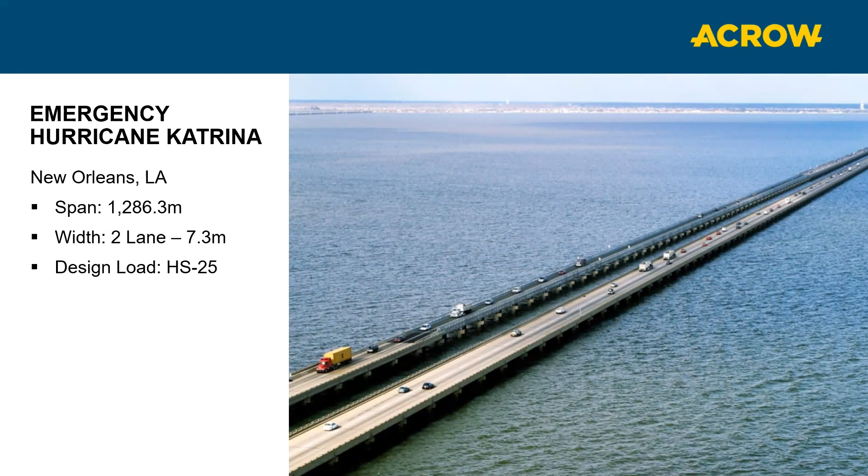Here are some other additional examples. There are a whole bunch of other applications that I'm not really going to get into that a panel bridge can accommodate—lots of capabilities with the modular system, such as this. I'm just going to quickly jump over these other applications, as I know we're running out of time.

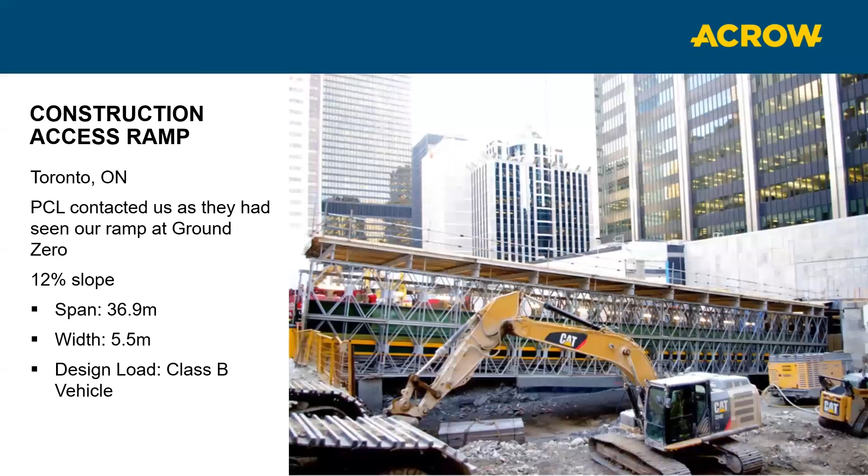Ramps, roll-on roll-off ramps, and such. So we talked about various different applications that can be served with this panel bridge system, the Acrow 700XS.

The features and benefits: these are made from high quality, high strength steel, with versatile applications for permanent, temporary, and emergency use. Very easily customizable according to the desired length and width or strength needed. They're pre-engineered, prefabricated to save time and money, precision engineered and designed for safety and durability, and all hot dip galvanized to prevent weathering and minimized maintenance.

These are fast and easy to assemble and install with a light crane or a bulldozer, installed with support from a team of experienced site technicians. Full service design and engineering according to the CHBDC code, with unlimited total spans as discussed, and shipped to anywhere in Canada.

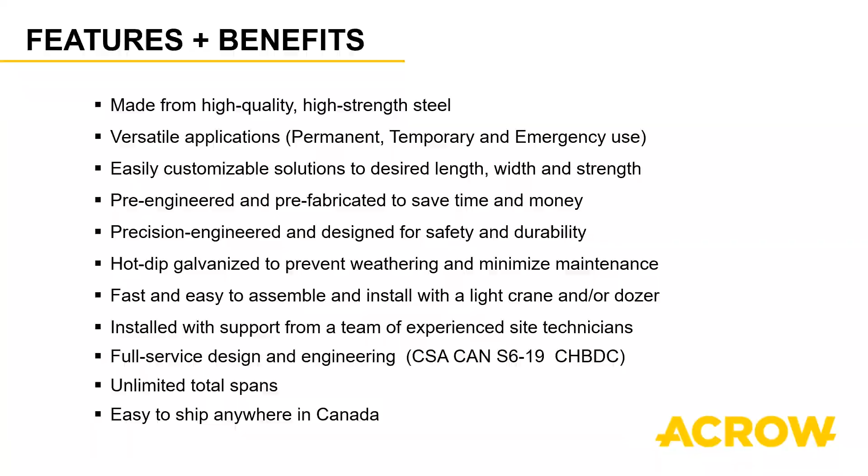If nothing else, what I'd like you to take away from this presentation is the recommendation of Dr. Barker: owners should consider both steel and concrete alternatives for individual bridge projects. I've shown you the Acrow 700XS panel bridge system, a proven advanced modular steel technology, and how it can solve various bridge design challenges. These are expertly manufactured using high quality, high strength steel, easily customizable, precision engineered, hot dip galvanized, and capable of rapid installation—which was really the name of this presentation, accelerated bridge construction.